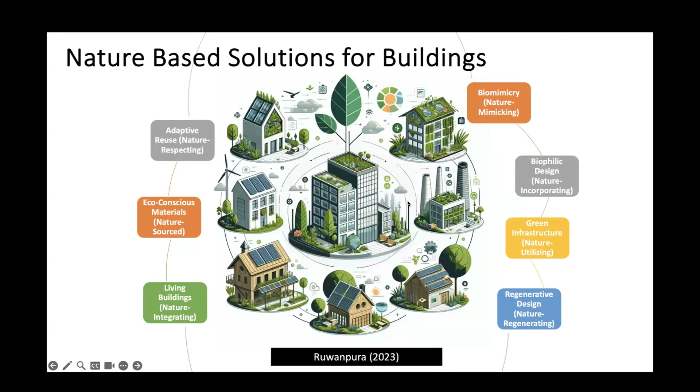So if we look at biomimicry in terms of nature mimicking, biomimicry involves designing buildings and structures that mimic nature's forms, functions, and systems. It is to ensure that we learn from nature, so that we include the designs and processes to solve the human challenges that we are facing today in terms of building construction.

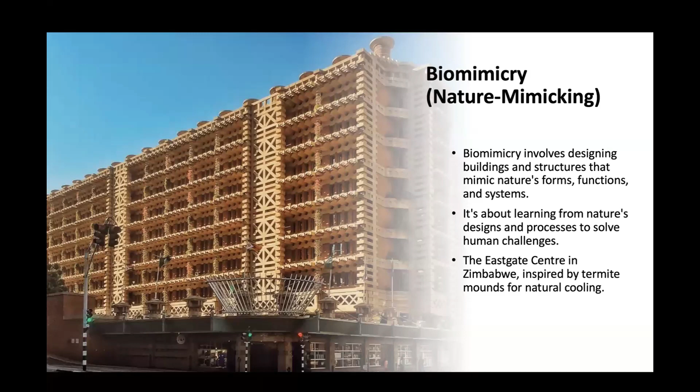A good example is the very famous project done in Zimbabwe called the Eastgate Centre, which is inspired by termite mounds for natural cooling. You can see a number of good YouTube videos on this project and how biomimicry is included there. When you look at termites in Zimbabwe or anywhere else, they create gigantic mounds where they farm fungus, which is their primary food source. The fungus must be kept, as you can see from the slides, at exactly 30 degrees, while the temperatures outside range anywhere from 1 degree to 40 degrees during the day.

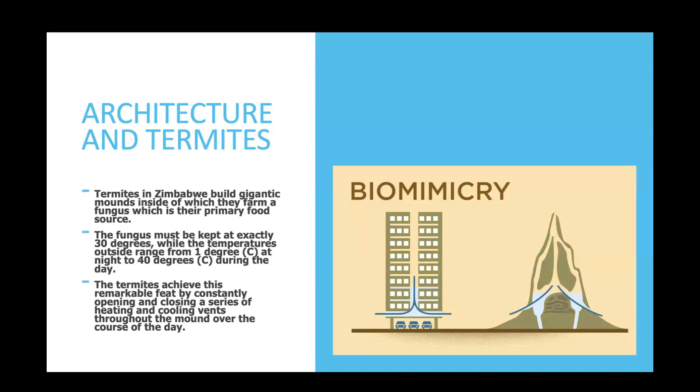Zimbabwe's weather is a little bit closer to Sri Lanka's, but not to the same extent in terms of the nighttime. These termites achieve this remarkable feat by constantly opening and closing a series of heating and cooling vents throughout the mound over the course of the day. That's the inspiration taken by the teams in Zimbabwe, who used this in a similar way for the building structures, first in the design and then in the construction part of it.

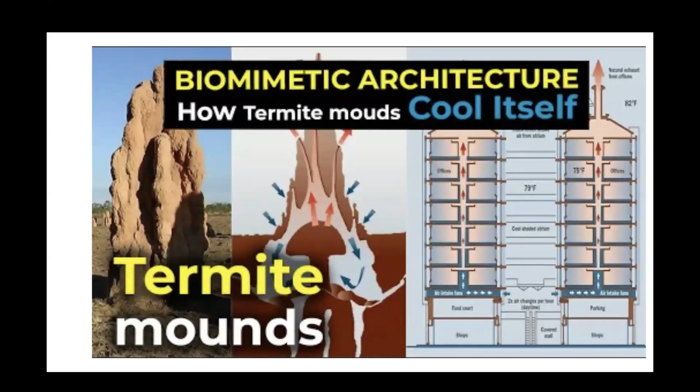Similarly, if you look at biophilic design, how do we look at incorporating nature? Again, we cannot talk about construction without talking about engineering and design, so I'm combining engineering, design, and construction here.

In this particular case, the design integrates natural elements, the materials, the forms, into the built environment, where occupants can be connected closely throughout the day with nature. This is where you use various elements related to plants, natural light, organic shapes, and water features.

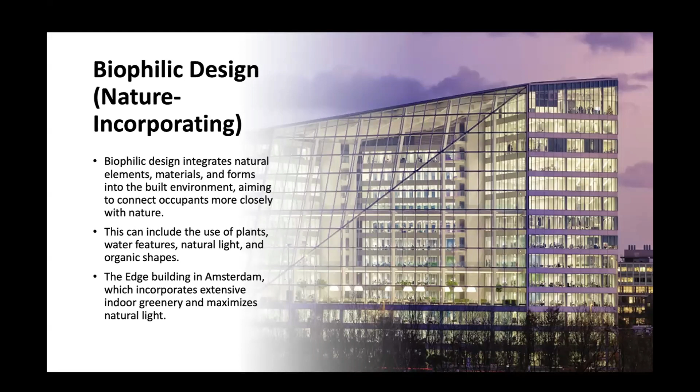I wish I had the chance to see this one when I was in Singapore earlier this year. This is biophilic design, incorporating nature. PARKROYAL is a very famous hotel chain with many hotels in Singapore and elsewhere. It's a hotel-in-a-garden concept, incorporating greenery extensively into its façades, walkways, and common areas, including very large contoured garden terraces with waterfalls and lush greenery, connecting with a nearby park into an urban hotel environment.

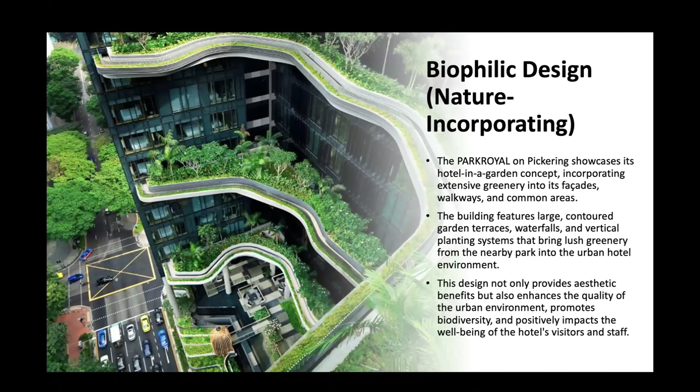If you think about it, in Sri Lanka we probably have various examples using a similar concept. The interesting thing is that the design aspect provides aesthetic benefits, enhances the urban environment, promotes biodiversity, and in terms of appearance, helps attract customers and guests, creating an environment beneficial for both visitors, guests, and hotel staff.

Next example is green infrastructure, where nature is utilized - natural or semi-natural systems for ecological, economic, and social benefits. This includes green roofs, rain gardens, and permeable pavements that manage stormwater and create green spaces.

Now the challenge is how we amalgamate design concepts with construction so that it can be buildable, constructible, with less maintenance after construction. Sometimes designers create structures that are beautiful, pleasing, but difficult to construct, and once construction is done, there are maintenance issues. If you do that, you lose the whole concept of sustainability.

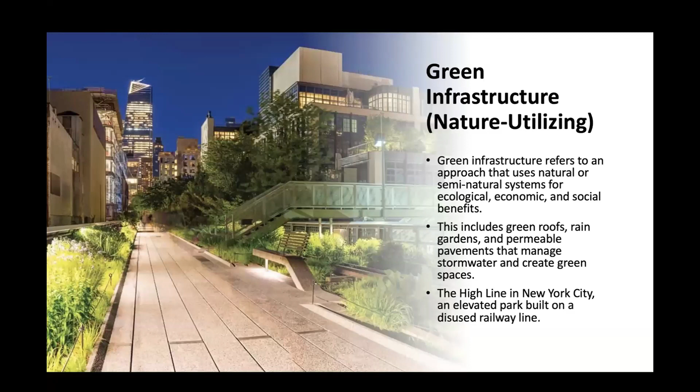This example is from New York City in the United States, an elevated park built on a disused railway line. From the sustainability perspective, that's a really good example of reuse.

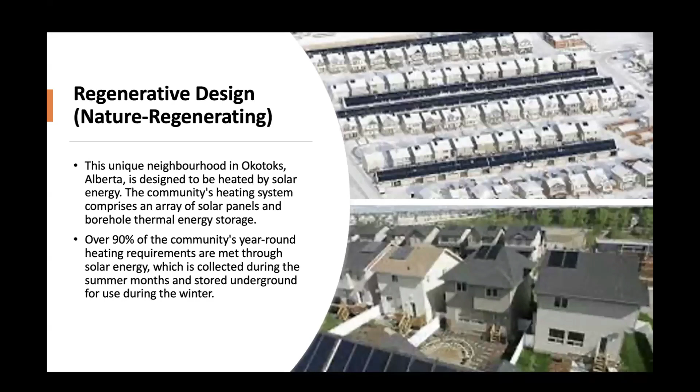This is an example of a neighborhood designed to be heated by solar energy, where the community's heating system comprises solar panels and borehole thermal energy storage. Over 90% of the community's year-round heating requirements are met through solar energy, collected during summer months and stored underground for use during winter - a great example of sustainability.

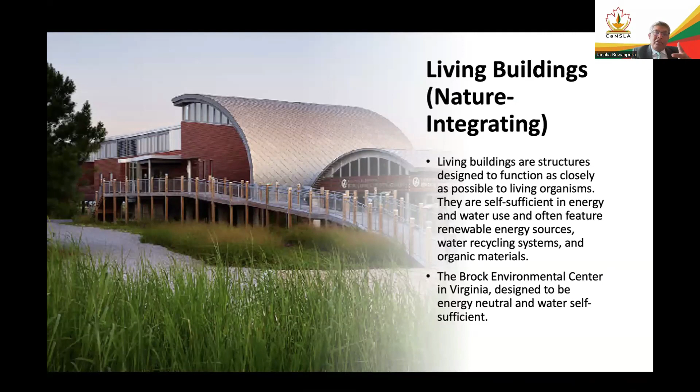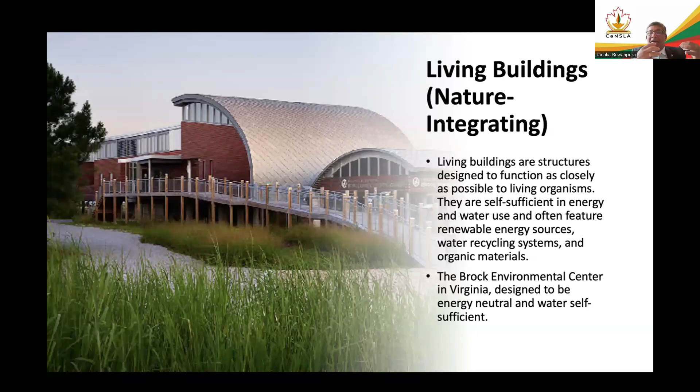When you look at nature-integrating living buildings, these are structures designed to function close to living organisms, self-sufficient in terms of energy use and water use, with renewable energy sources, water recycling systems, and organic materials. This example is from Virginia, United States, designed to be energy neutral and water self-sufficient, which is a fantastic example of sustainability.

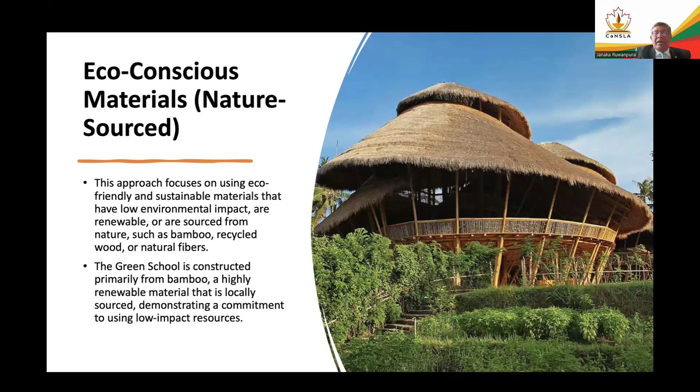I could put this question to you: how can we use our eco-conscious materials? We are in a tropical environment in Sri Lanka. This is an example within Asia that uses eco-friendly and sustainable materials with less environmental impact—renewable materials from nature like bamboo, which is available in Sri Lanka, as well as recycled wood and natural fibers. It's locally sourced and supplied, so there's a commitment to using low impact resources.

This is a Sri Lankan example where I got involved in my younger days—the tea factory at Kandapola—using adaptive reuse, which involves repurposing existing buildings or structures for new uses, reducing the need for new construction and new materials, and minimizing the environmental impact.

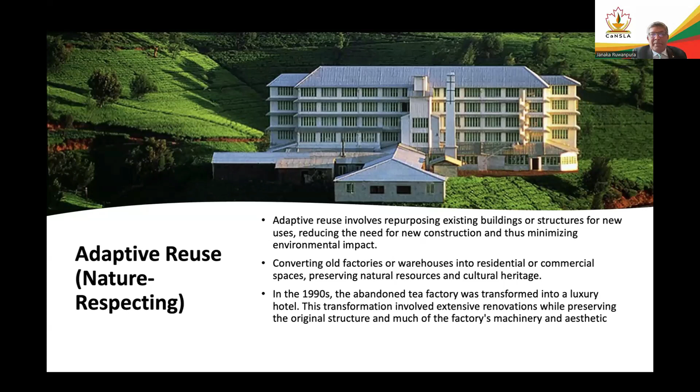So this is converting an old tea factory into a hotel, where you've seen examples of manufacturing factories or warehouses converted into residential or commercial spaces, preserving natural resources and cultural heritage. We actually used many of the exterior features—windows kept from the original structure with some minimal changes or modifications, making sure it kept the original intention, respecting the nature, and then adding other features into them.

But if you go back and think about the ISO standard 18458, something is biomimetic if the function analysis has been made of an available biological system. These are the theoretical principles behind that—the biological system has been abstracted into a model, and the developed model has been transferred and applied to design a product.

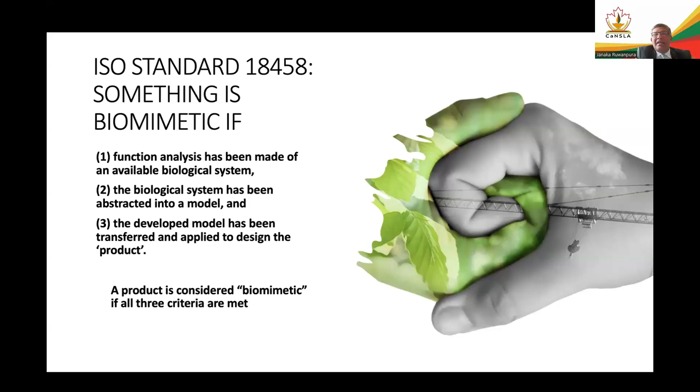So a product is considered biomimetic if all three criteria are met. That's why when you look at it, now add the word 'product' or 'building'—if you design and construct according to this criteria, it benefits the purpose of having that biomimicry nature.

You may have heard this, but a lotus leaf is an example—something available in Sri Lanka. We can work at any scale, from self-cleaning paint that mimics the microstructure of the lotus flower, to imagine a high-rise building or tower that mimics the termite mound ventilation structure to keep itself cool. At the same time, using the lotus feature on the flower and leaf creates self-cleaning windows, self-cleaning walls.

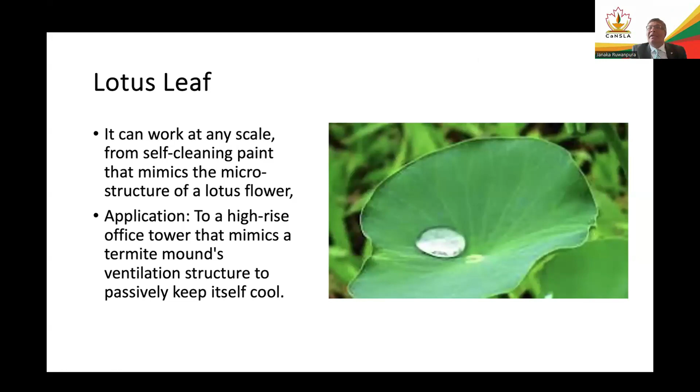And those are key at the end of the day. Before we talk about construction, there's an engineering design component that would be really beneficial for us to do—the whole concept of that.

Now, in order for us to do these types of things, what are the challenges for advancing biomimicry in building construction? These are five things that I have come across, and I wanted to work on this further with GAP as well, in terms of enhancing it into a more R&D environment.

I'm going to talk about five things here: challenges in terms of technical and structural, challenges in terms of environmental and sustainability, challenges for economic and practical, conceptual and integration, and regulatory and approvals, which I will go through one by one.

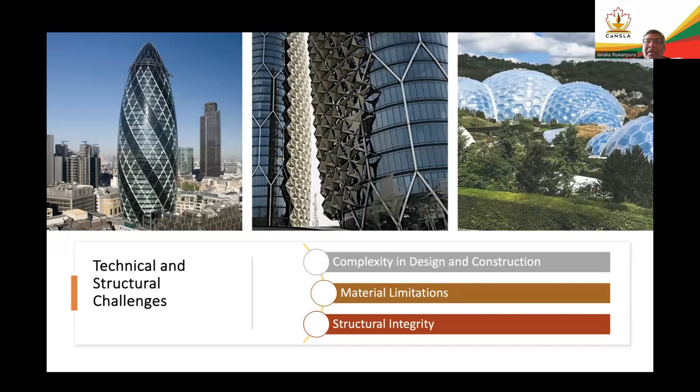So you can see that when you take a design like this one, how do we ensure the design elements are maintained? You can see several examples of the complexity in the design, and how that complexity is being constructed. How do we look at the limitations in terms of materials being adaptable, to ensure the design concepts are well maintained? We also want to make sure the structural integrity is maintained in a way that fulfills the requirements of the designer's challenges.

Then there's another example, the environmental and sustainability challenges. This is the Bahrain World Trade Center, where the challenge is integrating renewable energy generation within the structure itself without compromising the original design concept or aesthetics. Looking at it from a 360 view to ensure it wouldn't kill the whole architectural and engineering concept, the building incorporates three large wind turbines between the two towers, designed to take advantage of the wind flow.

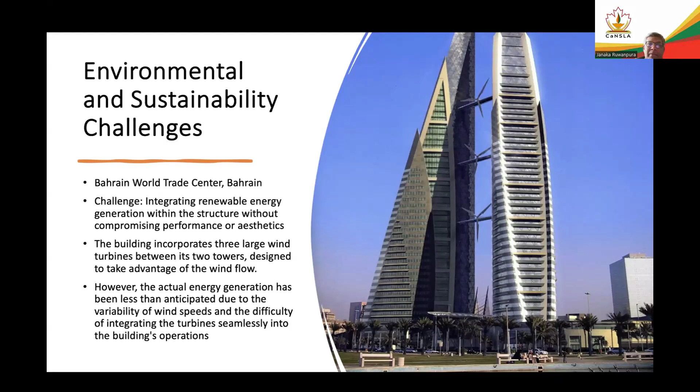But the actual energy generation has been less than anticipated, due to the variability of wind speeds and the difficulty of integrating the turbines seamlessly into the building's operation. So this is a challenge. You plan for something, you do all the calculations, but at the same time, the reality can sometimes be different than what you expected.

Economic and practical challenges - there's an example from Melbourne, Australia, where implementing innovative green technologies within budget constraints was the issue. The facades were designed to react to sunlight, along with a wastewater recycling system. These features contributed to the building's high sustainability ratings, getting it rated for LEED, for example, above conventional buildings. But the upfront cost was significantly higher than conventional buildings, and depending on the use of the building, the payback period could be long-term. So the question becomes, is it economical given the initial investment?

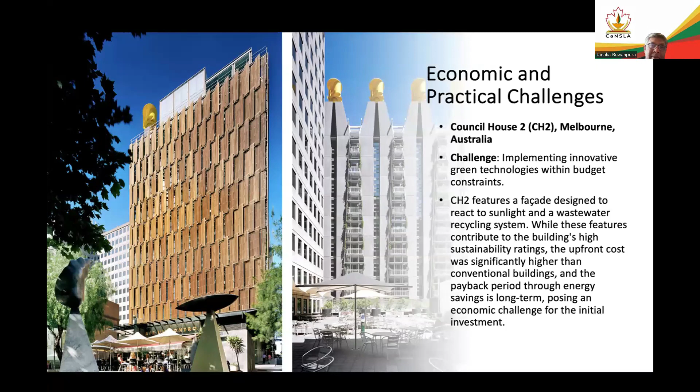I'm blessed to be both a professional quantity surveyor and a professional engineer. In my early days, these were some of the challenges I faced representing myself as a QS, even working with a renowned architect like Geoffrey Bawa. We were even scared to talk about the cost aspect of it, because you want to give designers the opportunity to come up with the best design. But then the challenges come in implementing the project, because the upfront cost may be pretty high compared to a typical building.

This is an example from the United States, integrating a range of biomimicry and sustainable features into a design - a living roof that mimics the hills of San Francisco, housing local plant species and wildlife. Integrating the living roof with the building's other systems - water management, energy efficiency, and design - the biggest challenge is to construct it according to the design. But once constructed, how do we ensure the people living in that building have fewer maintenance issues? Building green roofs, even for houses, to mimic something else can create quite a few challenges when actually using that building structure. So you have to be very careful at the construction stage.

The fifth element is an example from Germany: how do we ensure that the regulators who approve these things understand the innovative use of materials and systems that haven't previously been part of building regulations?

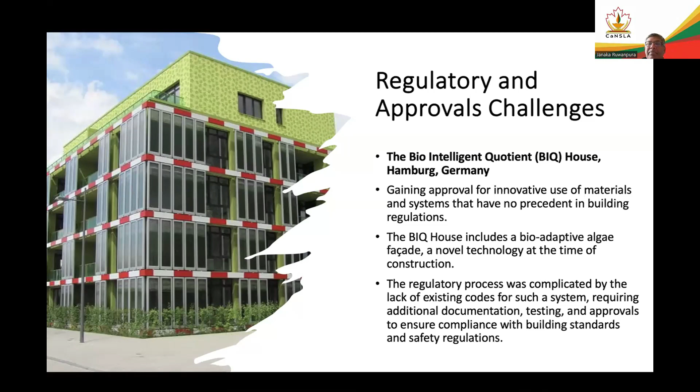Now, this is interesting - when I talk about biomimicry and nature, this is actually an AI generated building. So when you look at biomimicry principles for a proposed engineering building for my university, you look at the imaginary design. How do we ensure these are being done in a way that biomimicry principles are being identified? Let me take you through this example and talk about a few things.

Number one, how do we adapt biomimicry into the structure and function? For example, can you see that the facade is inspired by nature here - it actually mimics natural systems, such as the insulating properties of animal fur, or the self-cleaning mechanisms of certain plants. In terms of efficient air circulation, the design could incorporate ventilation systems that emulate the efficient air circulation found in natural structures, like the Eastgate example of termite mounds or the bird nest in China, which maintain stable temperatures without external energy inputs.

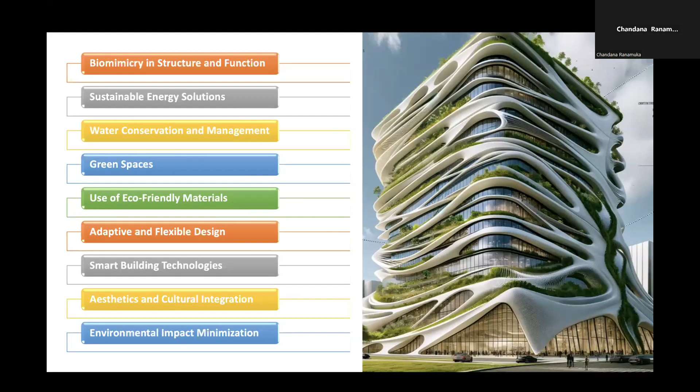Look at the building performance and comfort. Look at the cultural integration and aesthetics, right? So likewise, you can actually make sure that we look at things in detail, that would build into a proper design that would help in making the construction easier.

Because we want to make sure that, rather than going through traditional methods of procurement, the designers and constructors can work together. Having a design done so that it would be a sustainable construction going forward.

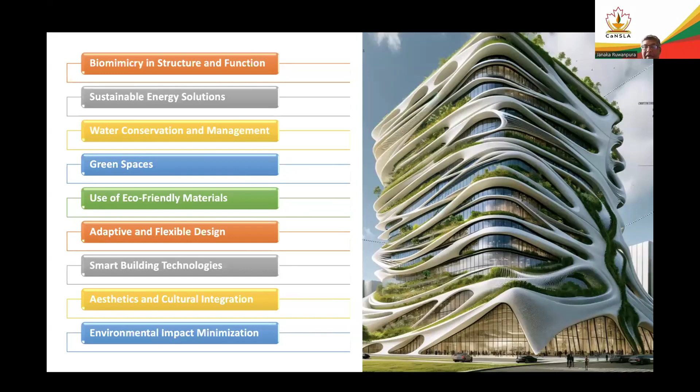Similarly, let's assume that we want to do a building for University of Peradeniya. Again, this is an imaginary picture that I have used where we can talk about a few things looking at your own environment. One is the natural ventilation, right?

Because of the warm, humid climate, the building can prioritize natural ventilation for a comfortable indoor environment, looking at the facade design, large windows, open corridors with air circulation.

You can look at the shading and cooling aspect of it to mitigate the heat, with overhanging roofs, deep verandas, shaded courtyards, and in terms of reducing the indoor temperature naturally.

Integration with nature, right? So you can also design and blend with the lush greenery, similar to the environment, promoting the biodiversity aspect of it.

Sustainable water management, rainwater harvesting, which is quite possible and quite essential given the rainfall in the region, so that efficient water management systems would ensure the sustainability and reduce the building's environmental impact.

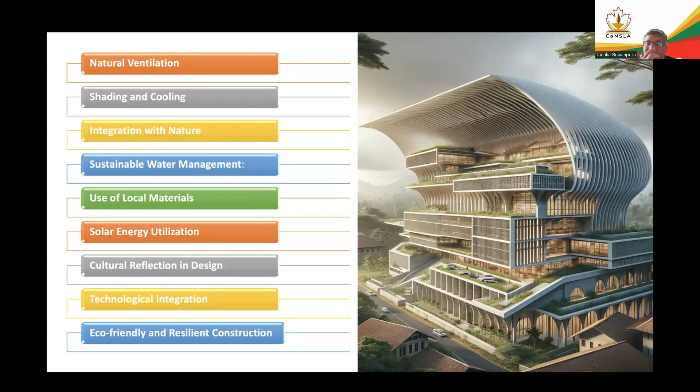So this is an integrative process. Before we talk about biomimicry in construction, we need to look at the whole mechanism of making sure that we bring nature-inspired opportunities into the design and engineering. Then it is easy to do the construction aspect of it. Before we talk about construction, I think it's critical that we look at the design and engineering, and then build that integration between design and engineering and the construction.